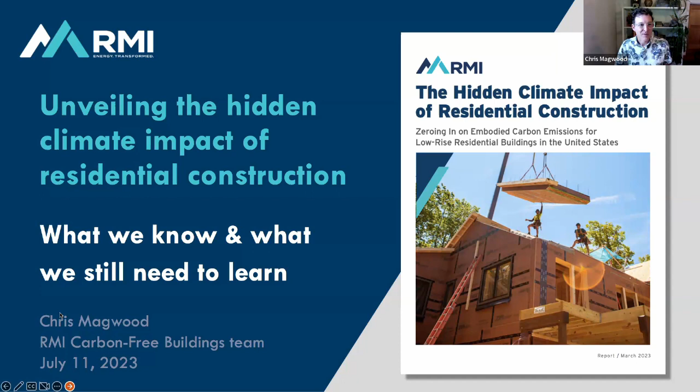So, brief further introduction to myself. Ken sort of alluded to this already, but I come from a background in residential design build. I started a little over 25 years ago in Ontario, Canada. Have done a lot of work with what people would call kind of the alternative materials, things like straw bale and hempcrete and stuff like that. But had the chance to work on a lot of really great buildings, both as a builder and, as Ken alluded to, as a teacher at Endeavor Center.

And before we dive in - so the work that I was doing at Endeavor was really focused on being a metrics-based way to do sustainable building. From my very earliest intros into the field, which was building my own house about 30 years ago, I quickly realized the extent to which greenwashing was kind of ubiquitous in the field. And so for my own house and for everything I've done after that, I was pretty obsessed with trying to figure out how do I measure that I'm doing something better, and then be able to do that early on in the project to sort of shape the design.

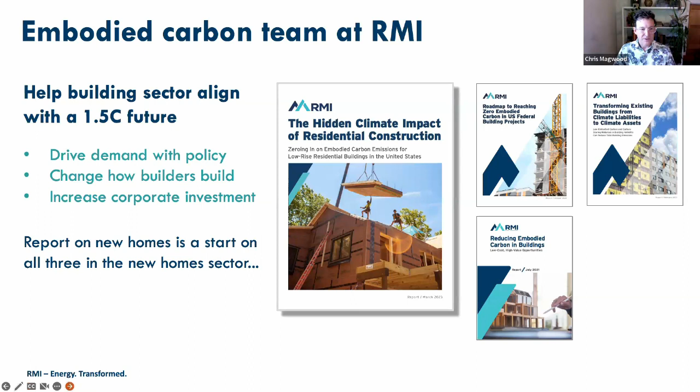I'll start with the big headline result from that study. At the big scale, if the average embodied carbon emissions we're seeing from the materials to make new homes in the US is at all accurate, and we spread that average out over all the new homes built in a year in the US, we're looking at somewhere in the neighborhood of 55 million tons of carbon going to the atmosphere from the materials used in making new buildings.

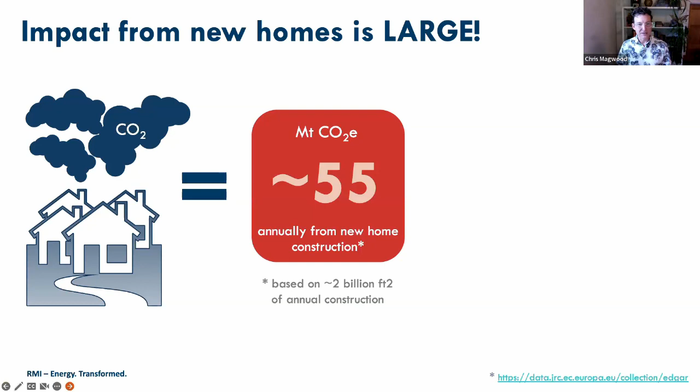I punched all these numbers into my spreadsheet and got this answer, 55 million, which seemed really big, but I wasn't sure what scale that was at. So I looked to EDGAR at emissions from entire countries, and emissions from materials for new homes in America are in the ballpark of emissions from entire European countries like Austria, Greece, Hungary, Norway.

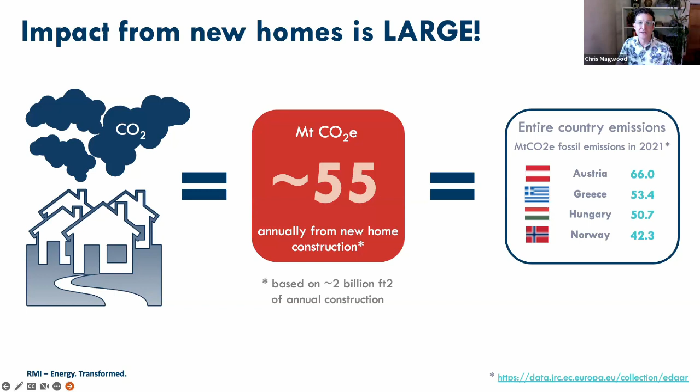So we're dealing with an issue here that is pretty substantial. If the new home sector in the US was its own country, it would rank somewhere in the 20s of global emitters. Altogether, a fairly major issue that if we're in this industry, we do want to be addressing.

The report from RMI is really a study of studies. With Builders for Climate Action, we had done four fairly large studies of embodied carbon in new homes, all working with as-built home designs—developers and builders gave us plans of things they'd recently built, and we did a full analysis. There were four different regions and climate zones, including South Carolina and Florida, so hot and humid climates, colder climates in Toronto and Nelson, and a West Coast, slightly more moderate climate in BC.

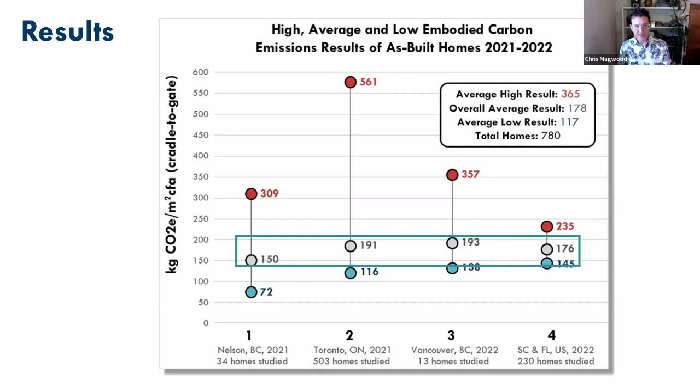As we modeled out those individual homes, we found what you see here in the red dots. In every location, there were homes that were quite high in terms of embodied carbon. The number shown is kilograms of emissions per square meter of heated floor area. What really stood out to me was that across all these studies—almost 800 homes, across all these regions, home styles and types—the average actually fell into a pretty narrow band, which made us feel we could take that average and estimate what emissions look like across the entire US, since so much of what we studied fell into that narrow band.

Before I go too much further, there are some different ways that we can report on emissions from buildings. I want to familiarize you with them because there's a good chance I'm going to bounce between these things.

One way is to look at the net emissions. You add up all emissions from all the materials of a building and get a total number, usually expressed in kilograms of CO2e or more likely for a whole home as tons. That number is great for estimating emissions across a region, a construction company, a city, or an entire country. But it's not a great way to compare between homes, because a 1,200 square foot home and a 5,000 square foot home are going to have different net emissions just based on size.

So to normalize for size, we take the net emissions and divide it by the conditioned floor area, and that way we get to an emissions intensity. The results I just showed you from the studies are in this intensity form.

We do intensity by conditioned floor area because we realized, especially looking at a lot of suburban homes, that very large garages tend to have lower per square foot emissions than conditioned space. The garage is often not insulated, it's not finished, there's no interior walls, so there's a lot less net emissions. If we just looked at gross floor area, building a giant garage would actually make a home look better from an embodied carbon point of view.

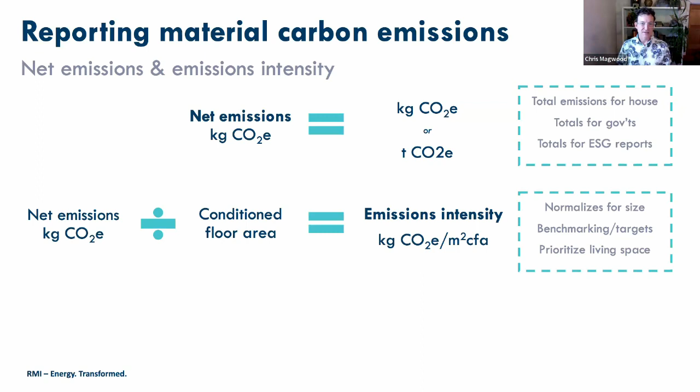So, along with the partners in the cities we were doing these studies for, we decided to prioritize living space. When we do intensity by conditioned floor area, things like unfinished basements and garages are penalized, because the emissions from those materials are part of the total, but we're only dividing that total by the conditioned floor area. Rather than giving benefit to those non-living spaces, this way of looking at intensity penalizes them.

We're not really looking at this in today's presentation, but it is a really interesting way to think about it, and I invite you to go to the report and look at this: emissions intensity per bedroom, which tries to get at a way of thinking about emissions not by the size of the building, but by the number of people it's serving.

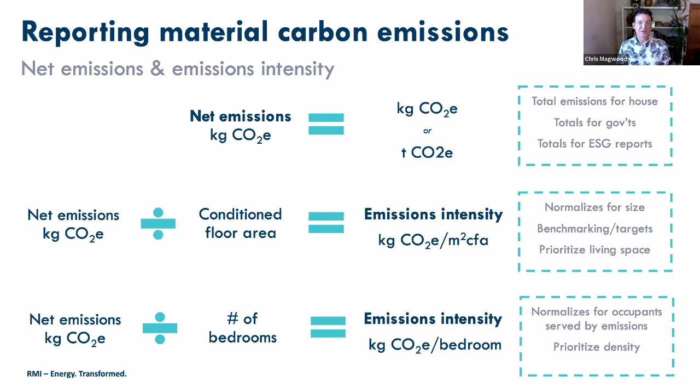It's really interesting—quite often in the same study, if you look at a building by emissions intensity by floor area, it looks like one of the best buildings in the study. If you look at it by emissions intensity per bedroom, it can be one of the worst. So if you're thinking about density, or emissions per person served, this can be a really good way of thinking about emissions as well.

Briefly, the tool used to do all these studies is the one I helped develop at Builders for Climate Action. It's called BEAM. It's a free spreadsheet tool, based on environmental product declarations, and it's quite simple to use. Because the same tool is used across all of these studies, the results are quite comparable between them, which is often not the case with embodied carbon studies, since different software will give you different answers. We wanted to make sure we were using the same tool and methodology across all of them.

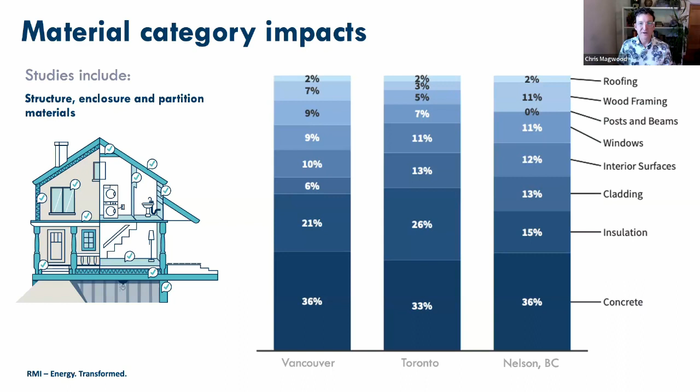As this little chart shows, there's no point really in addressing it in your roof, because the roof framing and the roofing itself is a pretty small percentage of the average building.

One thing I want to point out is that those results I showed you, the per square meter results across the studies, there's a lot of things that aren't included in that. They're not included because currently the data isn't particularly great, or it wasn't when we did those studies. So we didn't include things like mechanical, electrical, and plumbing, fixtures, appliances, finishes, all of those sorts of things.

Since the studies were done, there's a bit more data out there on these things. So you can see here, I've done an estimate for a sort of average 200 square meter, which is about 2,000 square foot house. And some really substantial quantities of emissions are in finishes.

In particular, paint was a bit surprising—this model house had over 2 tons of emissions associated with the paint on the walls and ceilings. And exterior and interior doors added quite a bit too, with just over 1 ton each.

For fixtures, if you have 3 bathrooms, each with a toilet, sink, and tub, you're looking at about 1,200 kilograms, or 1.2 tons, in total. So per fixture, it's not that big.

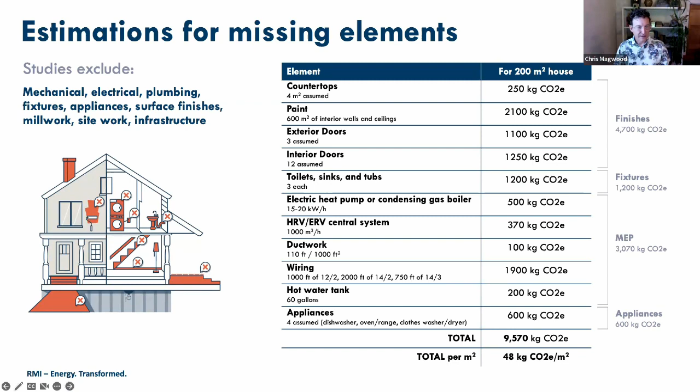To me, that's our low-hanging fruit. It just identifies that cost-effective, available, affordable, code-compliant materials are out there and being used—in these cases by happy accident, not by choice—but that there is a way that homes can reduce their embodied carbon by 30 to 50%, over the counter today,

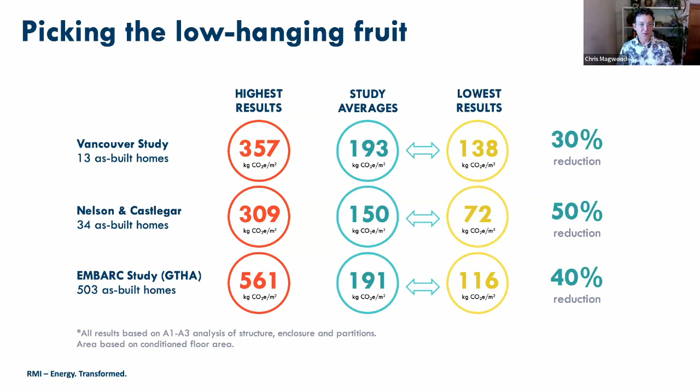It's just sort of these accidents of one builder happens to choose materials that are at the high end of their category for embodied carbon, and another builder happens to choose materials that are at the low end. But that low end is really encouraging to me, if we're looking at reducing emissions globally by 40% by 2030. There's a pathway for home builders right there. The 40% reduction option and pathway already exists, and we can see it illuminated in the study.

This is a quick snapshot from the study we did for Vancouver, where we took, in red, those key material categories from the previous slide, and from the as-built scenario, looked at what if we substituted that with some of the best available materials on the market today. You can see that got us a 44% reduction, something in that 40% range, by choosing materials currently in the market and being used by builders.

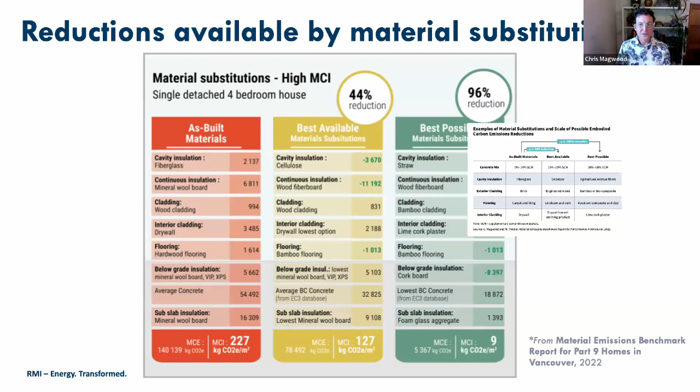And then we cast our eye forward a bit and looked at what if you put in some of the best possible materials, all of which also exist, but they're used much less frequently and may not be as widely available. In that case, we're able to see a pathway to something pretty close to a zero embodied carbon home.

Having done these studies, and in particular having worked with a bunch of the developers whose plans were or contributed to the studies, I think there's a lot of appetite in the industry to start reducing embodied carbon, but also people get really overwhelmed. When I say to them, hey, 40% reduction is available to you, they're not quite sure how they're possibly going to get there.

So one of the things that we're really working to show builders now is that you don't have to tackle that 40% tomorrow. If we're trying to reduce emissions by 40% by 2030, and you start this year, really, if you start knocking 5% a year off your home plans, off your designs, you will get to something close to 40% by 2030.

That just makes it more of a staged and intentional effort to get there. Obviously, if you want to jump from where you are today to a lot lower, that's great too. But it could be like this year, talk to your concrete supplier and find the lowest carbon concrete that is in your market and that can work for you. Good chance that's going to actually knock off a lot more than 5%. So that's what you need to do for this year.

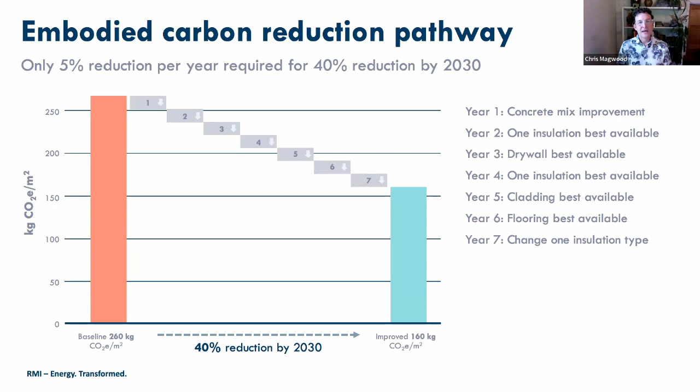Maybe next year you start comparing between the brands of insulation you're using, and you don't even have to change the type of insulation. You may find that just changing to the brand that has the lowest carbon footprint, there's your next 5%, etc. This isn't a prescription, and it won't be the way everybody does it, but the idea is you can address this one piece at a time and still really build towards some meaningful reductions.

And if it sounds like a 5% reduction is not all that amazing, to put that in context, if every home being built in the U.S. reduced its embodied carbon by 5%, that would be the same as avoiding the emissions from a California wildfire. So these incremental impacts that we can make, if we make them collectively across the whole industry, they really do add up. And if we can keep staging those 5% changes year by year, we really do get ourselves on the pathway that we need to be on.

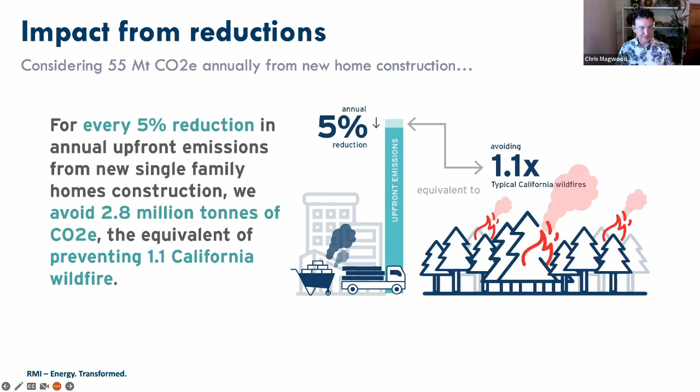Because I come from a background in building energy efficient buildings, and I know this is a passive house group, so the intersection of operational and embodied emissions is really important to all of us. And I think the one thing that I really want to stress, if you leave this presentation with only this piece, is that quite often the operational and embodied side are seen as trade-offs, like you could make one better but it'll make the other worse, or vice versa. And what we found in the study in Nelson, BC, where we had both the energy models for every home done in the same program, Canada's Hot 2000 program, and then our embodied carbon models, what we found was there was no direct correlation between energy efficiency and embodied carbon.

British Columbia has a step code energy system. Something at step 1 is the least energy efficient, and something at step 5 is Canada's equivalent to a net zero ready home. So definitely not passive house level of efficiency, but high and higher than code minimum. Steps 2, 3, and 4 are in between.

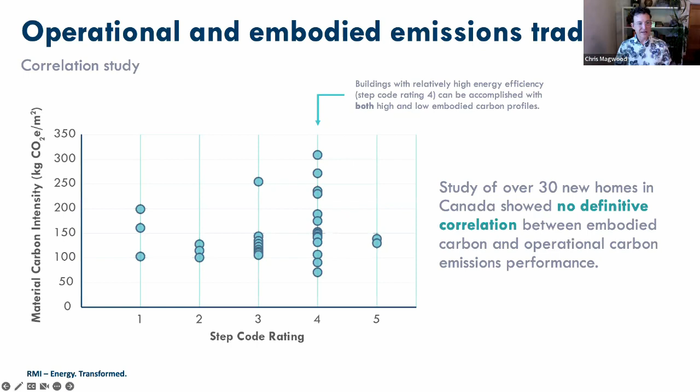Similarly, if you look across the study, there was no direct correlation between the energy efficiency of the home and the embodied carbon. This points to something that I know from my own practice, which is that we don't have to give up one to get the other. We need to be paying attention to both of these, and the need to get both to zero in the next few decades is real. We can't go about it with the mindset that doing one really well is going to make the other one worse. We have to tackle this addressing both sides of that equation equally and with the same level of determination.

So this is just an illustration of that same notion. You can have a high embodied carbon house with really low operating emissions, and its total emissions are still high. And you can reduce that embodied carbon, but if you haven't addressed the operational side, it's still high. The only way to get a real whole life carbon result that's low is to be working at both simultaneously.

While I don't want to put it in terms of trade-offs, because I don't think that's the right language, I think what you want to be doing is looking at these two things iteratively at the same time. Does this move that I'm making to reduce the operating emissions have a really high embodied carbon impact? If so, can I change that impact so that I can still achieve the operational goal, but not do the embodied carbon? Maybe that particular operational intervention isn't worthwhile when you look at the embodied impacts. There's not going to be a single answer, in the same way that not everybody makes a passive house the same way.

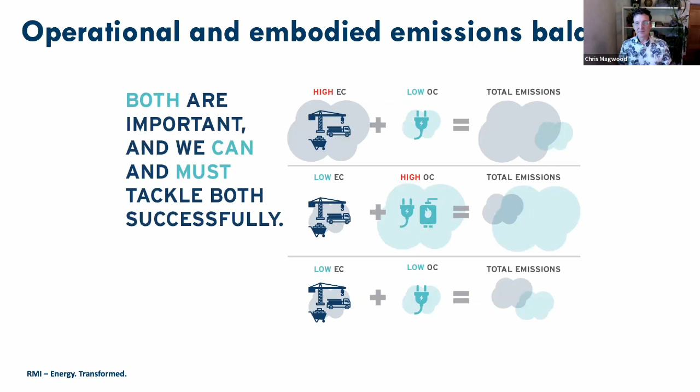Sometimes you are going to decide that it's better to throw more insulation in the attic than to get a better window, or you're going to address it on the mechanical side - there are many pathways. When you throw the embodied carbon assessment into there, it's just another factor that you'll end up balancing. Everybody in this space is getting pretty good at optimizing, and the embodied carbon piece is not an either-or, it's something that you just start working in and optimizing.

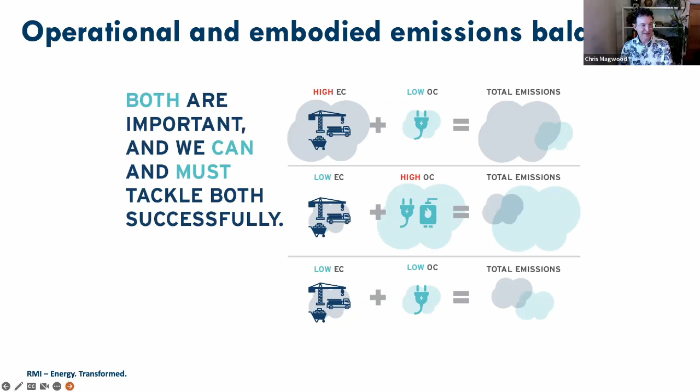Oh, my slides seem to be frozen. Let's see if that needs to go. You're not frozen. No, I'm not frozen, just my slides are. Do you want to try sharing them again? Yeah, let's see.

Okay, so I'm just about at the end of the presentation piece here. I just want to quickly share a couple of case studies that we included in the report. This one, Vali Mews by Vali Homes in Phoenix - I chose this one because it's a great example of paying attention to both sides of that operational and embodied equation. These are passive house designed; I'm pretty sure they're getting them certified, but I won't say that for sure. So they're really addressing operationally - they're electrified and passive house level of efficiency.

They're also really paying attention to the materials, such that their carbon footprint, in this case 59 kilograms per meter squared of conditioned floor area, is half of even some of the best results in the studies. They're able to far surpass what we saw as a good example in the studies we did.

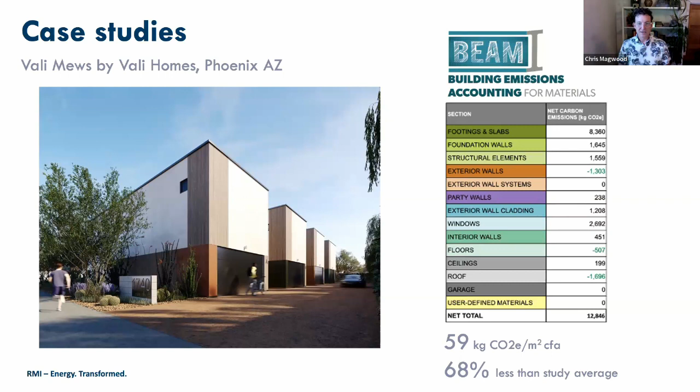Similarly, New Frameworks—this home also designed to, I'm not sure about certified Passive House, but again really energy efficient—got the material emission side down to just over 30 kilograms per square meter, an even smaller fraction of what's considered average in the studies we looked at. Just a couple companies, and there are many more, where both sides of that equation, the embodied and the operational, are being taken seriously, with big movement on both sides.

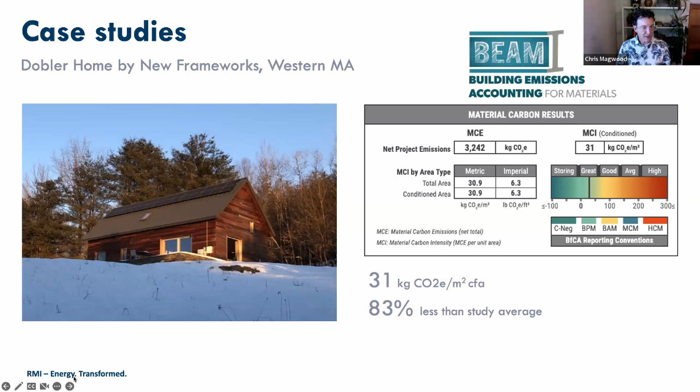Yeah, just again, some more examples, some from my own practice, some from builder colleagues here in Ontario, but all different ways of getting to either zero or very close to zero on both the operational and the embodied side.

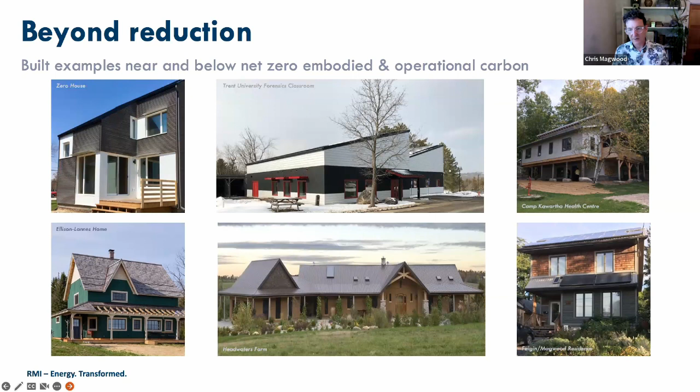I wanted this collection of homes, or buildings, put together because there isn't one suite of materials or aesthetic or anything that guides a home to zero embodied carbon. It's really iterative and done on a case-by-case basis.

So next steps for me and the work I'm doing at RMI on this topic. We are just setting out—the RESNET board approved just earlier this week—the development of a standard for calculating and reporting embodied carbon in new homes.

This is an attempt to make sure that once the standard is done, everybody who's measuring it gets the same answers, because we're all using the same methodology, relying on the same standard. This will be an ANSI standard, useful to people who do HERS ratings, but also open to anybody who wants to measure their embodied carbon the same way.

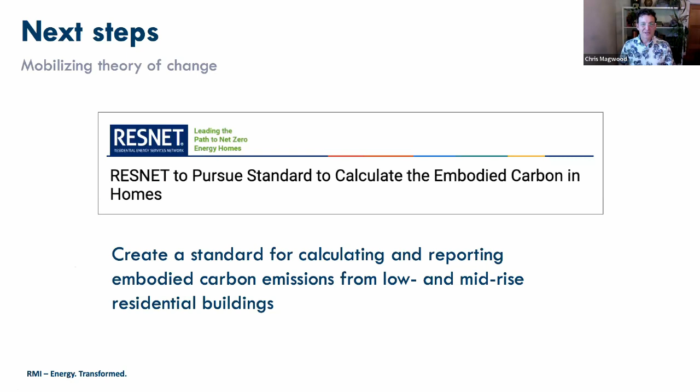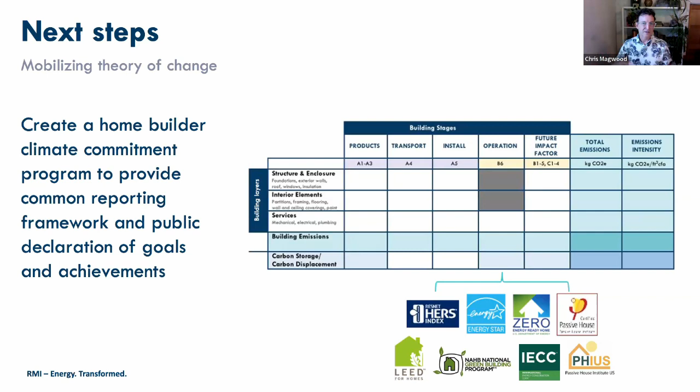We are also working at RMI on a voluntary home builder climate commitment program. That's a way home builders can report on both their operating and embodied emissions, make public declarations about being on a pathway, and report on and share their decarbonization pathway with their investors, their home buyers, and the industry.

So I think with that, that's the end of the presentation bit. Ken, if you want to do Q&A, I'll come back in.

Good to go. Great presentation. Thank you, Chris. And as expected, a lot of good questions, detailed in general. We'll try to incorporate as many as we can in the time remaining. Chris, I didn't mention this while we were logging in—if I could clean up the questions we don't get to, make it easy for you to respond, could you send us answers back following up, and we'll post those online along with the presentation. So don't fear if we don't get to you, but we'll do what we can. Or maybe fear, because then you'll get a very long-winded written answer instead of a short verbal one.